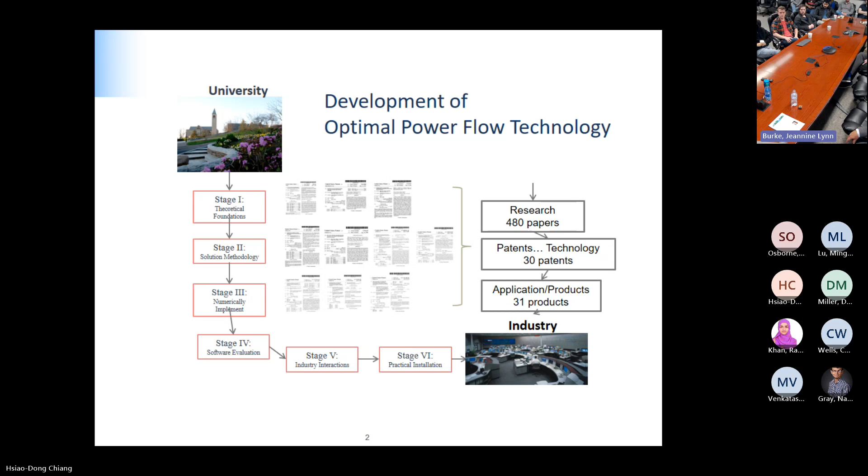So over this, we have published about 480 papers and 30 patents, about 20 some are US patents. And now there are about 31 products over transmission and distribution and optimization. So I enjoy this route. And for example, the top one is California ISO Control Center. The bottom one is the PJM Control Center.

And if you look at the California ISO, they have 3 groups of users. The green one is an operator. And the orange one is an online study mode by planning engineers, I should say operational planning engineers. And then the blue one is a look-ahead, 2 hours, 4.5 hours, and day-ahead study. Okay, so they have 3 groups of users.

And in the control room, there are 3 basic functions: state estimation every 1 minute, contingency analysis every 2 minutes, and our package, voltage stability assessment, every 4 minutes. So this is 24/7. Our package is to ensure voltage stability and calculate the transfer limit for each interface. They have about 20 some interfaces they define. We have to compute the transfer limit.

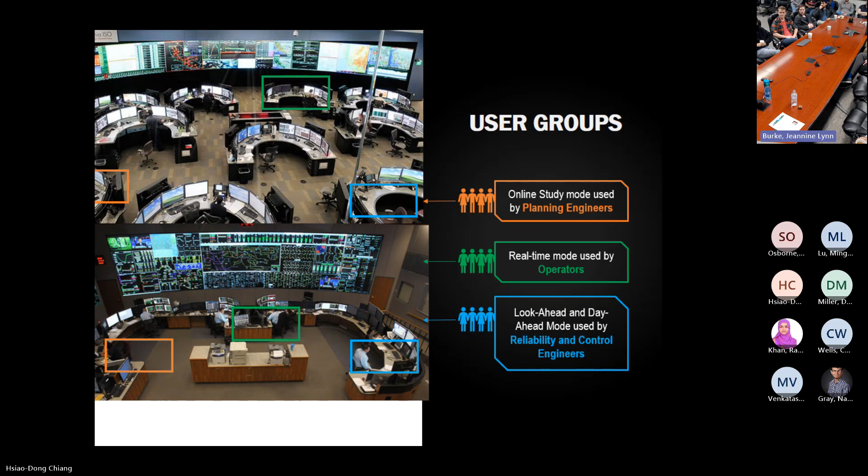And the same thing at PJM. PJM adopted our technology in 2003. I think probably this is the first online VSA in the United States, 2003. And the California ISO is 2006. And I document some of the theory in the book, Stability Regions of Nonlinear Dynamical Systems, published by Cambridge University in 2015.

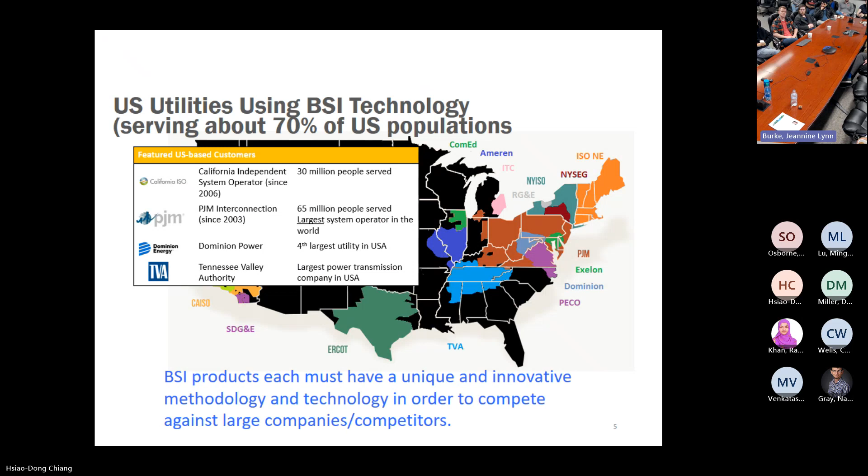Okay, so this is our key customers. So our product each must have a unique and innovative methodology in order to compete against large competitors. Otherwise, we have little chance of winning the project.

Okay, so optimal power flow. So I started this research in 2006 or 2008, initiated by Tokyo Electric. At that time, they said, let's also work on OPF, optimal power flow. So as you know, OPF has been an active research and development area since 1962, right? 62 years, over the last 62 years, from the first paper by Carpentier.

So basically, you want to optimize an objective function subject to equality constraints, which is the AC power flow, and the inequality constraints, which are the thermal limit, voltage constraint, transformer constraint, phase shifter constraint, capacitor constraint, real power and reactive power constraint. So this is a very generic

representation of OPF. I worked about 4 to 5 years with TEPCO on this topic, and I summarized the number of different objective functions. Actually, it's 53. The typical ones are production cost, losses, and so on. But actually, there are 53 different objective functions depending on your application. Okay.

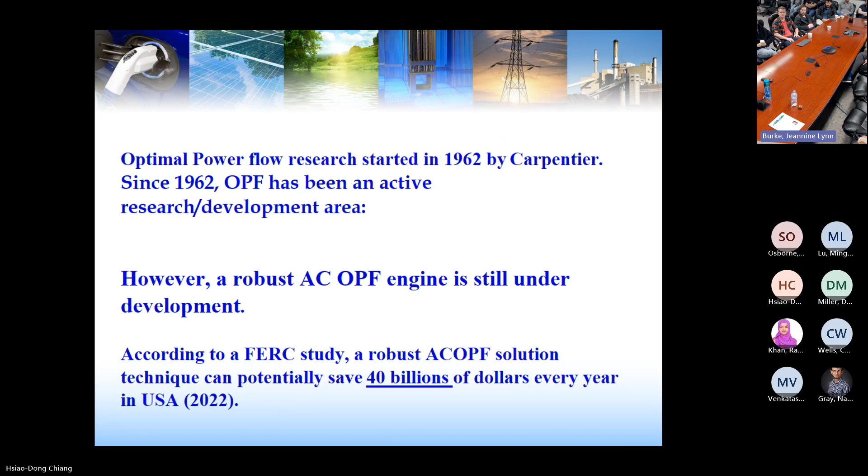So the OPF competition started in 2018. Originally, first place in the competition got $2 million, second place 1 million, third place $500,000. Then later on, they revised it: 5 million to invite 20 teams, each team $250,000. Then award 4 million, second year award 2 million. So the total is 11 million in the competition.

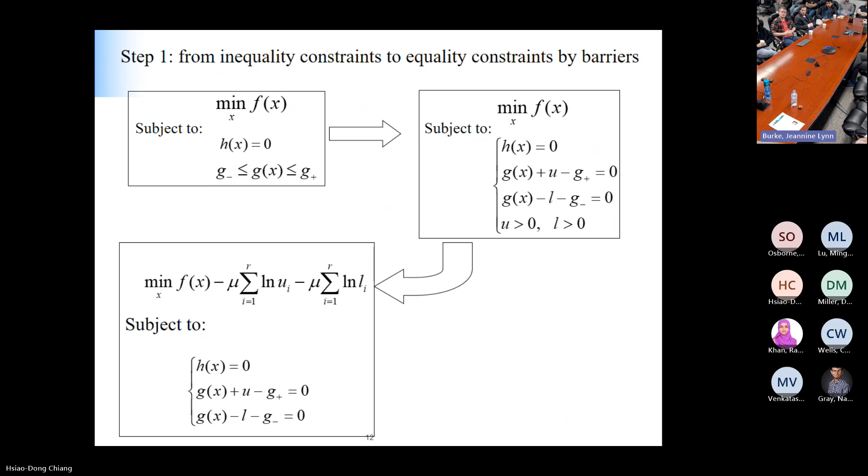So a very quick overview of the interior point method. You have an objective function, you have equality constraints, you have inequality constraints. So the first step is you convert the inequality constraints into equalities with slack variables, positive numbers. Second, you eliminate these by putting them as a penalty in the objective function. And then you have equality, so you are solving an equality-constrained optimization problem, and now you use Lagrange. You form the Lagrangian, you take the first-order necessary conditions, the KKT conditions. So you need to solve this set of algebraic equations, and the interior point method uses Newton's method to solve it.

So if I use the pure interior point method by IBM, they have an open source one, maybe I would end up outside the top 10. I could not get into the top 10. So when I looked at the problem, I realized the problem of the interior point method. That is this number, the thermal limit.

One is nonlinear. Thermal limit is nonlinear. Second one is this number is huge. For a power network, the largest number of components is transmission lines and transformers. So the interior point method, no matter what, constrains yourself by considering this in advance. Right. All the inequality constraints into equality constraints, and then take the Lagrange. That's wrong. That's not the right thing to do for solving OPF.

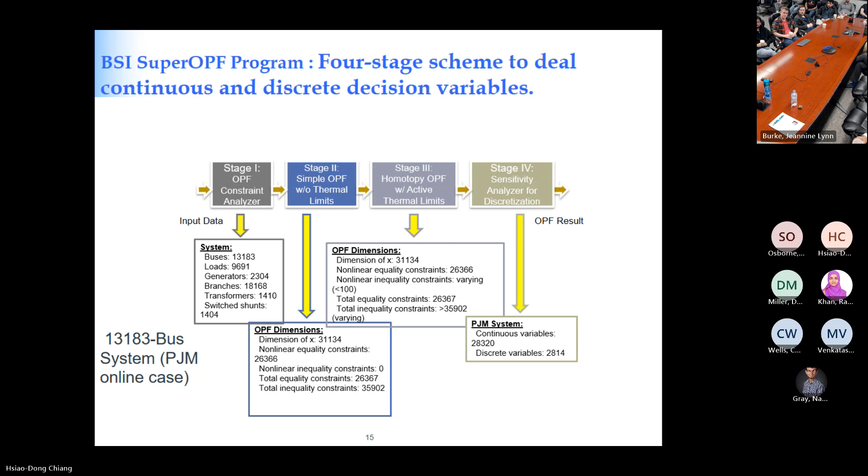And for this one, I use a real-time, actually a state estimation result from PJM, about 5,600 megawatt loss, about 2%. Stage 2, stage 3, I can reduce losses about 45%. And then I want to check the robustness of my algorithm. So I use continuation power flow to generate 9 additional operating points until the nose point. And then at each point I apply the algorithm to see whether I can solve it. So 10 out of 10, we can solve the problem.

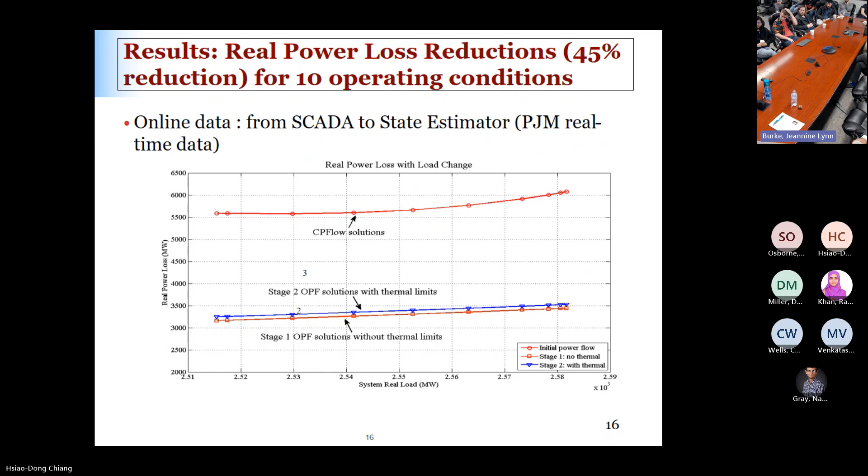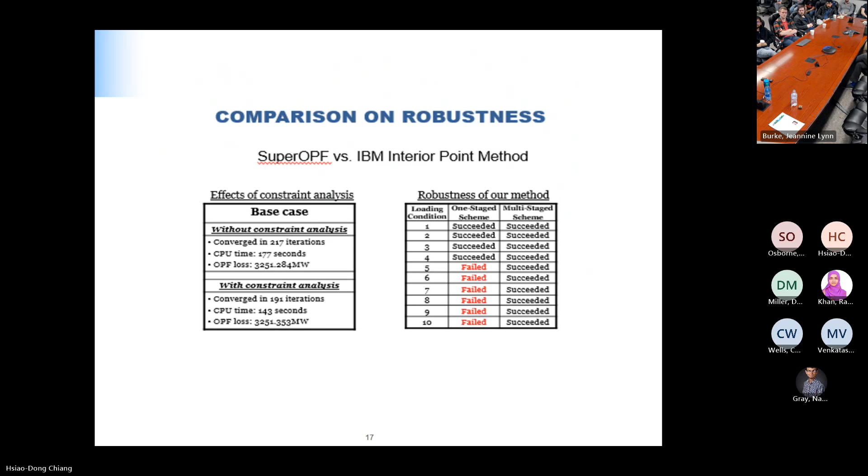If I don't do it this way, and just use the pure interior point method, it only converges up to here, 40% convergence, if I don't do this treatment. So this is if I use a one-stage scheme like the original interior point method, the success rate is 40%. And my proposed method is 100%. And we have a patent on this one.

And we also conducted a convergence analysis. Right? I want to prove the convergence of my algorithm. I use my paper with my postdoc on the global convergence of a class of homotopy methods for nonlinear circuit systems. So this is a general theory for homotopy methods, and it's general for circuits and systems. We apply the theorem to prove our global convergence. Okay.

Okay. Now, I was excited about this one. So I called California ISO and said, send me a case. Let me try our algorithm. So they did send me a case, 6,500 plus buses. So about half of California ISO. California ISO was about half of PJM at that time. And I thought this would be a piece of cake, right? Smaller system. But it turns out it's a piece of iron. I cannot solve it. I could not solve it for 3 months.

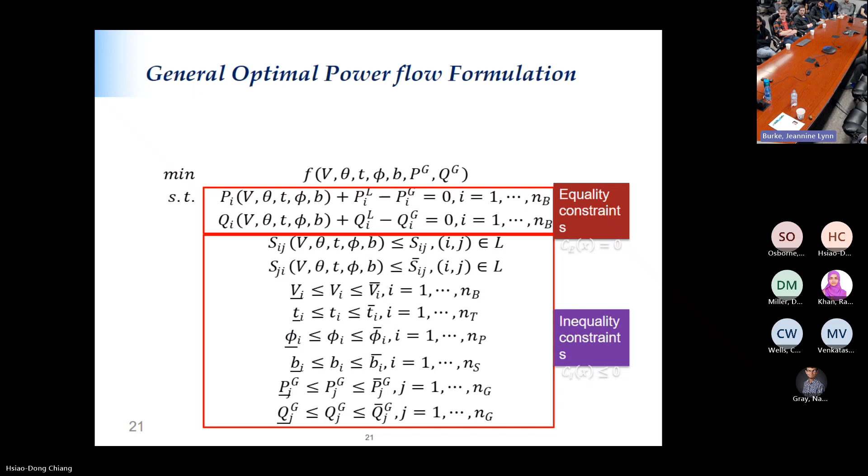Then what would you do? I couldn't remember how many meetings I had with my engineers. What's going on? We couldn't solve it. So I was also very quiet. I didn't call California. Very quiet. And one day when I was driving in May, I remember that May, I realized there's no solution. Right? I realized there should be no solution. But you cannot say no solution. You have to prove it, right? You have to prove it. So that is the second story.

I went through a lot of proofs. Okay, it's this paper, Feasible Region of Optimal Power Flow: Characterization and Application. This paper gives you a complete characterization of the feasible region of OPF. If the feasible region is an empty set, then there's no solution. And this theorem says if it is an empty set, then it will converge to a degenerate stable equilibrium manifold. And that degenerate information, which is one vector, will tell you why there's no solution. It gives you a physical explanation.

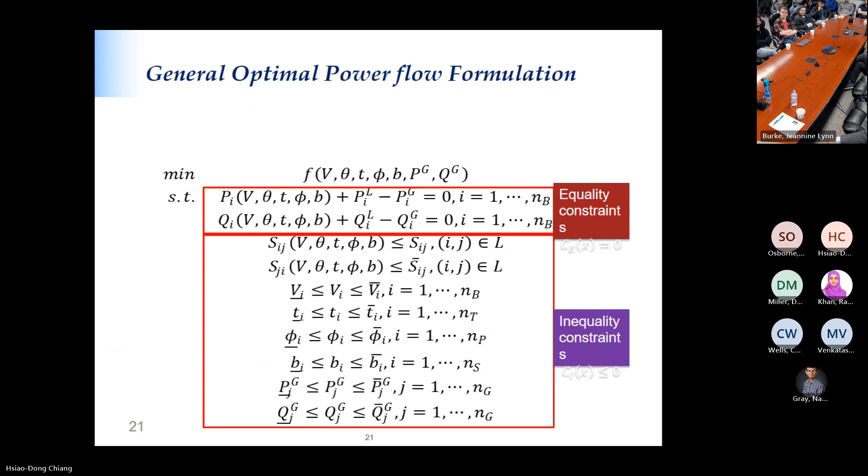Okay, I use this technique, slack variables, to convert your inequality constraint and equality constraint into an equality constraint. That is the slack variables concept. So we define the feasible region as the collection of control variables such that H of control variable, state variable, slack variables equals 0. You want to find U satisfying the equality constraint and inequality constraint. So that is the feasible region. Now the question is, how do you characterize this feasible region? Give a complete characterization.

And I looked at the literature. There are few works, only one from Canada, a math department, but the approach they use is very complicated, and I decided not to use that approach. So I developed my own. Yes, any question? Okay.

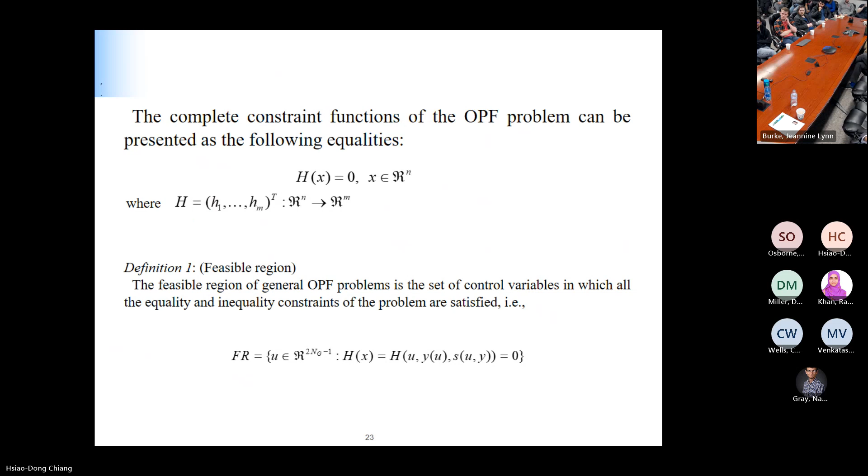So this is my approach. My DNA is dynamical systems, right? So I want to convert the problem into a dynamical system problem. Your H, right? H(x) equals 0. Your Jacobian of H transpose, minus, I construct a dynamical system. I call it QGS. I want to use this dynamical system to characterize the feasible region. And this is good for large-scale systems. Scalability is quite good.

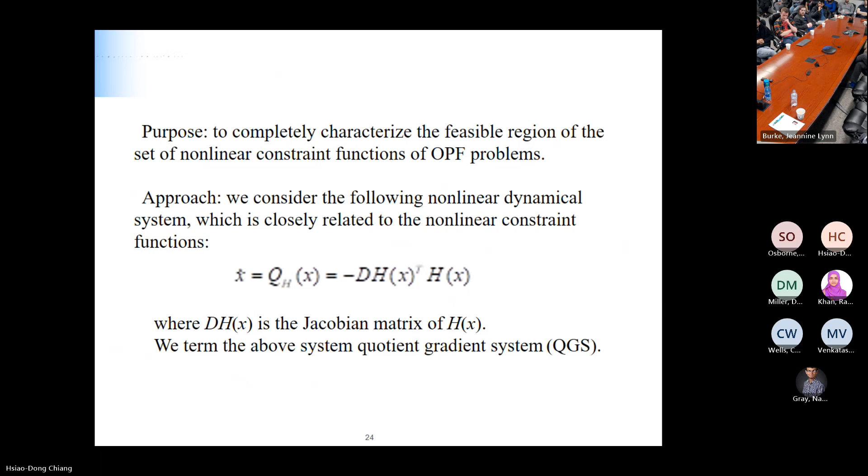So I was able to prove a path-connected set is a feasible component of the constraint set if and only if it is a regular stable equilibrium manifold of the QGS dynamical system. So the feasible region is the union of regular stable equilibrium manifolds of the QGS. For example, this 9-bus system. If you use a brute force approach to plot the feasible region, it is the left-hand side. If you use my theorem, it is the right-hand side, one-to-one.

This is a regular stable equilibrium manifold of QGS. It's your feasible component. So this feasible region has 3 components. Each component contains at least 1 local minimum. If you have a KKT point here, then you can have 2. If you have 2 KKT points, you can have 3. So I published a paper on the lower bound of local optimal solutions.

But there is some interesting theory. This one, the red one, is a degenerate stable equilibrium manifold. So if you increase the load, these two will bifurcate through this point. Then the feasible components go from 3 to 2, and then from 2 to 1. And then this one will shrink when you increase the loading condition. And then at your limit operating point, it's a single regular point and then disappears.

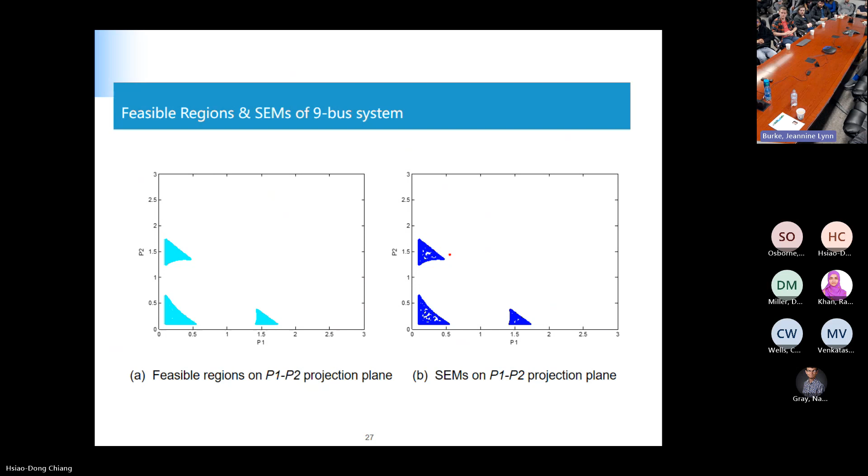Okay, so this theorem says the feasible region is a union of regular stable equilibrium manifolds of my QGS system. And then I was able to prove every trajectory of my QGS system must converge to one of the stable equilibrium manifolds. But this stable equilibrium manifold can be regular or degenerate. But all converge. Okay, and then this is the same, every trajectory converges. So what that means is any point will converge to a feasible component. So it's global convergence.

So this has a very nice property, global convergence, and this is a smooth manifold. Unlike Newton's method, which has a lot of holes here, divergence regions. But with this, we don't have that problem. Very smooth manifold. So as I said, this is the feasible region of optimal power flow. It is the first paper to characterize this feasible region.

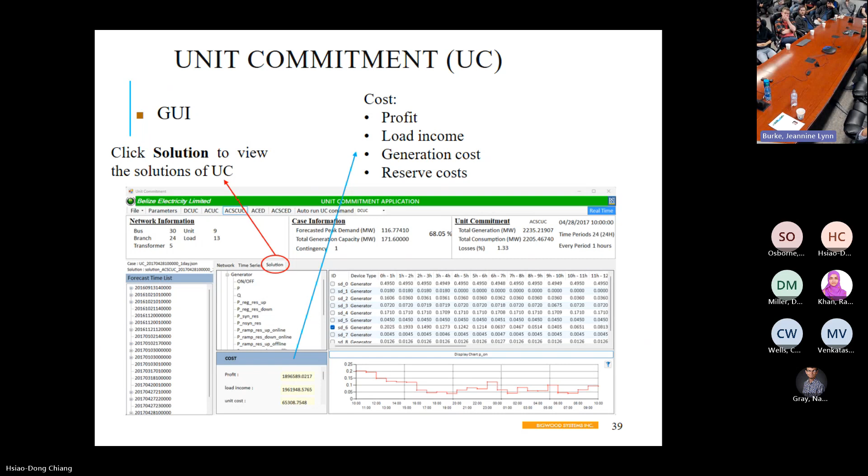So this time there were 15 teams, and we got the first award. We got first place in event 1, third place in event 2, first place again in the third event, and in the last one we got top 1 and top 2. So this is our performance in this competition.

So this problem formulation is very complicated. It's 320 equations. Your model covers very detailed things. You can look up the model on the internet. It's a 62-page problem formulation. The explanation of the problem formulation is 62 pages.

So they have 3 divisions. Division 1 is 8 hours look ahead, so it's about 18 periods. The first is 15 minutes for 2 hours, and then half hour for the next few hours, so total is 18 periods. Division 2 is 2-day unit commitment. Division 3 is 1 week, 168 hours. As I said, in division 1 we are number 1, division 2 we are number 1, division 3 we are number 2.

So it's very challenging because you have millions of discrete variables and constraints. And I found that the most challenging part is the ramping constraint. The ramping constraint is not easy. You want to optimize, and you want to maintain the ramping constraint. So for this part, I paid attention to how to make sure ramping constraints are satisfied.

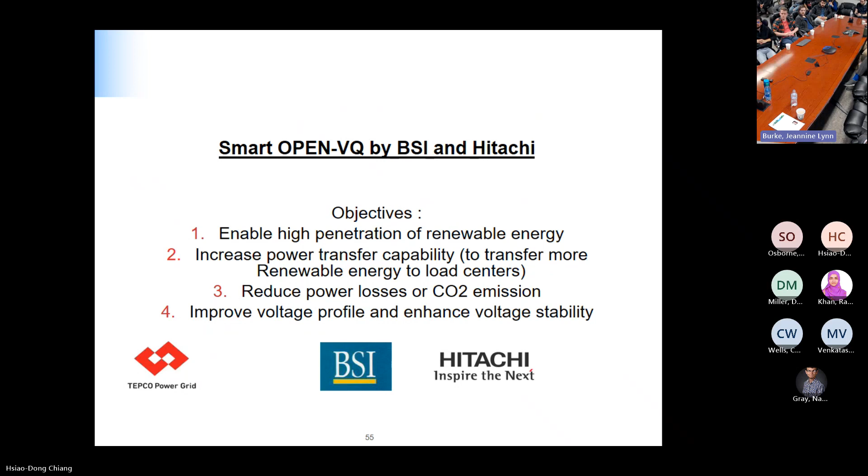So this one, we test on TEPCO case, the result is quite good. Even for loss reduction per year, savings of 15 million to 20 million per year. ATC improved by 10% without smart wire. Without smart wire, we can increase the ATC by 10%. And then the impact on the CAPEX. But I want to share with you another successful story. News release is 2023, April 26th. This is a demonstration project supported by NEDO. NEDO provides $8 million for this demonstration project.